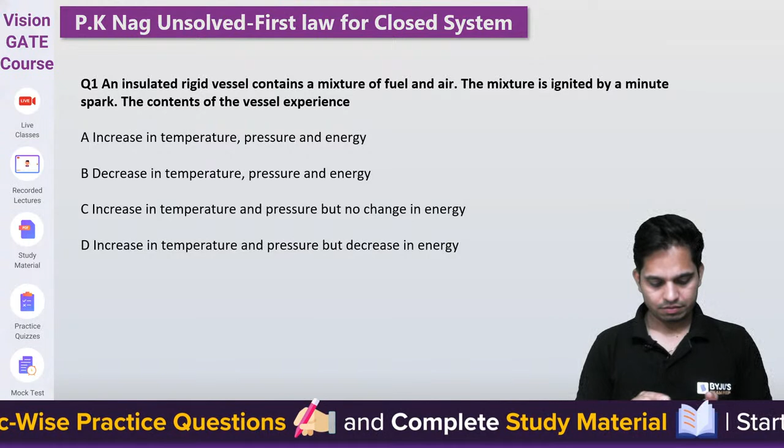Chalo, quickly. Good evening, Anu. How are you? Good evening. Good evening. Quickly answer.

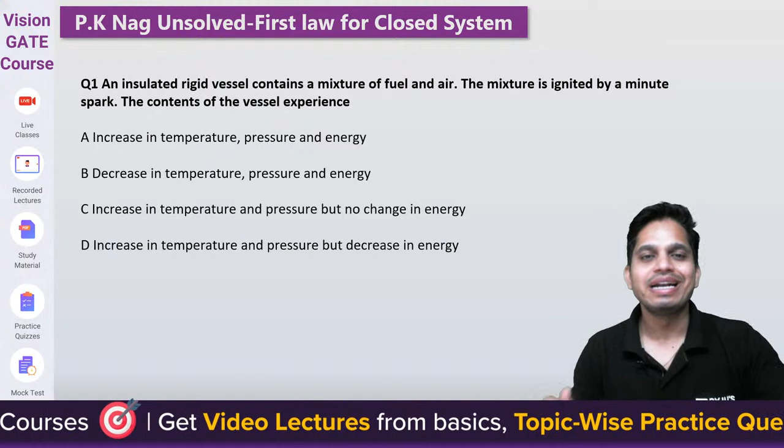So guys, an insulated rigid vessel contains a mixture of fuel and air. The mixture is ignited by a minute spark. The content of the vessel experiences... what are they going to experience, guys?

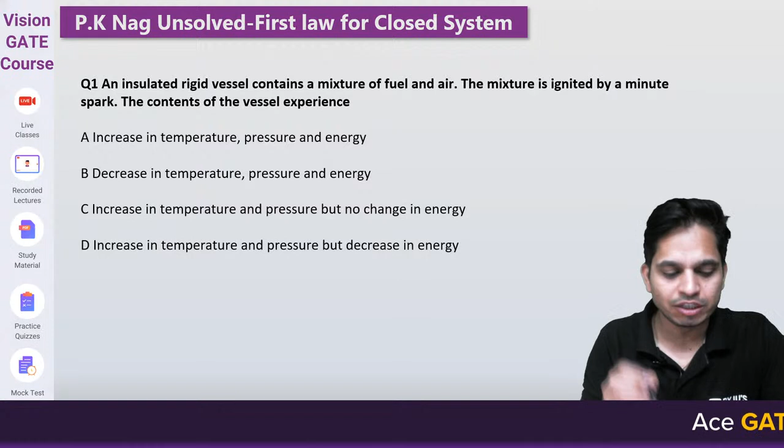So we have a rigid container. There are two things. First, rigid - if they are saying rigid, that means work will be 0. If they are saying insulated, that means Q will be 0. Yes or no, guys?

Now tell me: increase in temperature, pressure and energy; decrease in temperature, pressure and energy; increase in temperature and pressure but no change in energy; or increase in temperature and pressure but decrease in energy. Good evening, Maniket, kaise ho bhai?

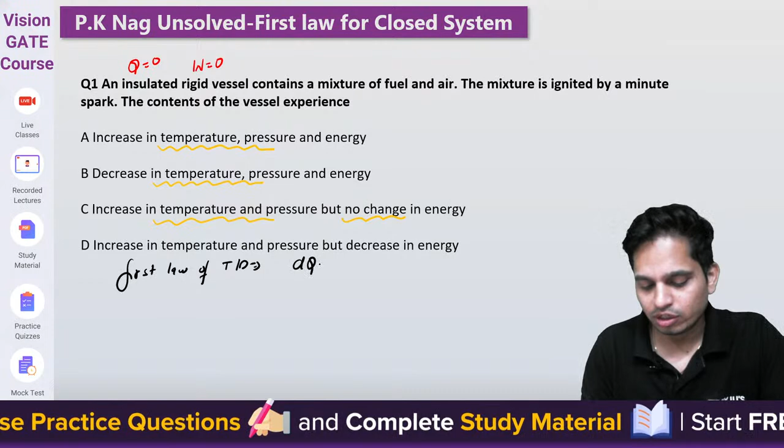So, as you know, first law of thermodynamics tells me that dq is equals to du plus dw. Now there is no heat transfer, no work transfer. So du will be 0. U initial will be equal to U final.

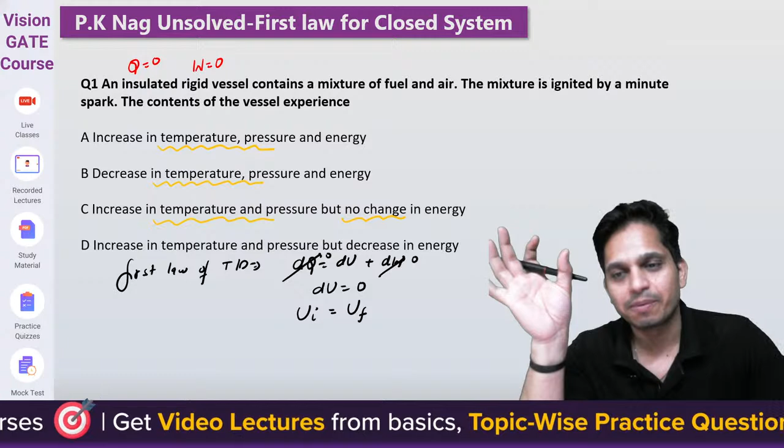Had it been only air, then temperature must have been constant, but it is not air - it is a mixture of fuel and air. So therefore, the energy must remain constant. Only the chemical energy will be converted to thermal energy, that is all, but the total energy will remain same. Total energy will remain same, and therefore C is the correct answer. C is the correct answer. Understood?

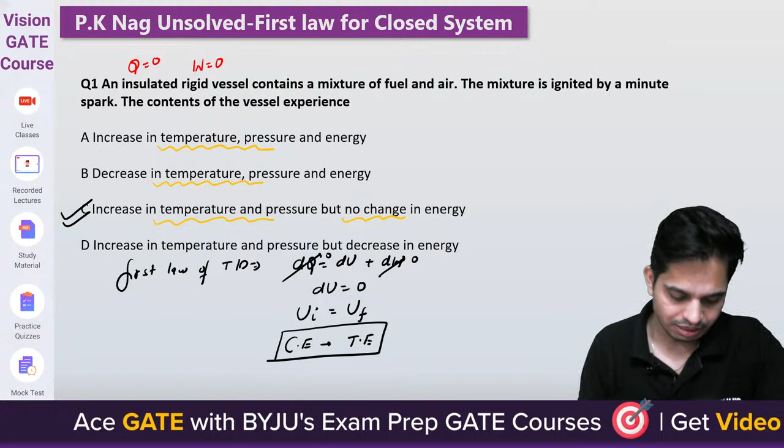Next question. A vertical cylinder with a freely floating piston - so I have a vertical cylinder with a freely floating piston, contains 0.1 kg of air at pressure 1.2 bar and a small electrical resistor.

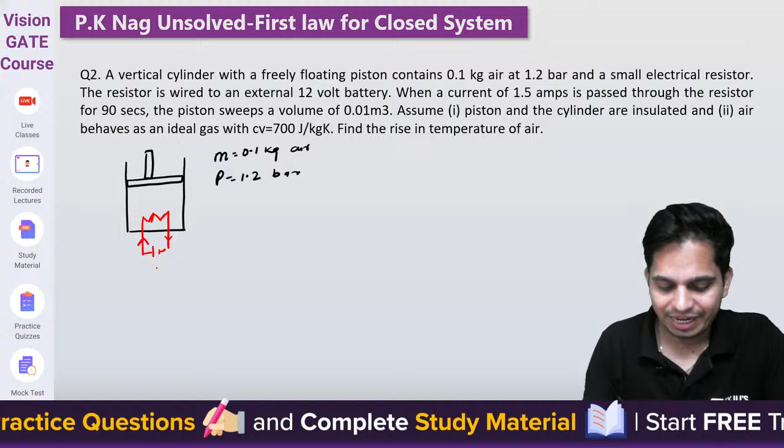What do we have? We have a small electrical resistor. The resistor is wired to an external voltage. Voltage is equals to 12 volt and 1.5 ampere current is passed into the resistor for 90 seconds.

The piston sweeps a volume of 0.01 meter cube - that means your swept volume or change in volume is 0.01 meter cube. Now what do you assume? Piston and cylinder are insulated, that means there is no heat transfer, Q is equals to 0. Air behaves as ideal gas with CV 700 joule per kg Kelvin.

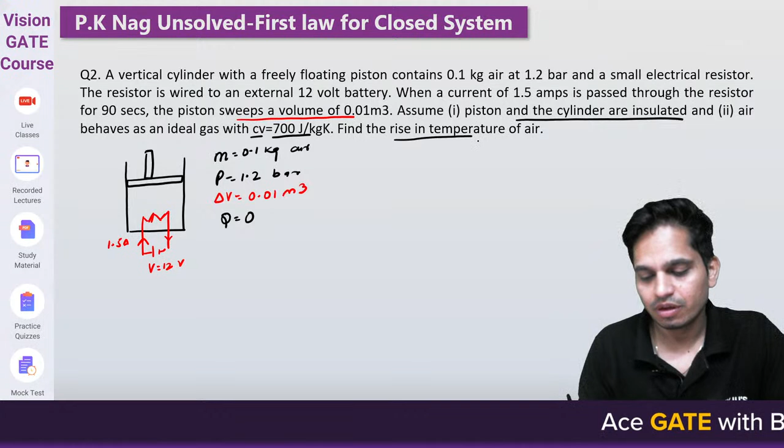So find the rise in temperature. Find the rise in temperature. How do you find rise in temperature? Again, guys, it is a closed system. It is what? A closed system. Now, if it is a closed system,

dq is equals to du plus dw. Yes or no? Yes. It is an insulated system. If it is an insulated system, dq will be 0. And therefore 0 is equals to du plus, now what work is happening? One is piston work and one is electrical work. Now electrical work is given to the system.

Electrical work is given to the system, so you will take minus here, minus. And this will be mCV T2 minus T1, I need to find out T2 minus T1, dt. Plus piston work is how much? PdV minus electrical work, voltage into current into time.

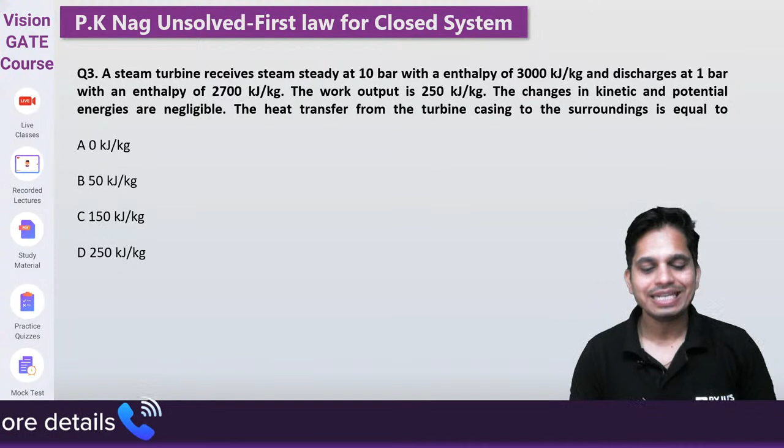Chalo, next question. A steam turbine receives steam steadily at 10 bar, enthalpy inlet H1 is equal to 3000 kilojoule per kg, and comes out at enthalpy H exit as given. The work output is 250 kilojoule per kg. Now changes in kinetic energy.

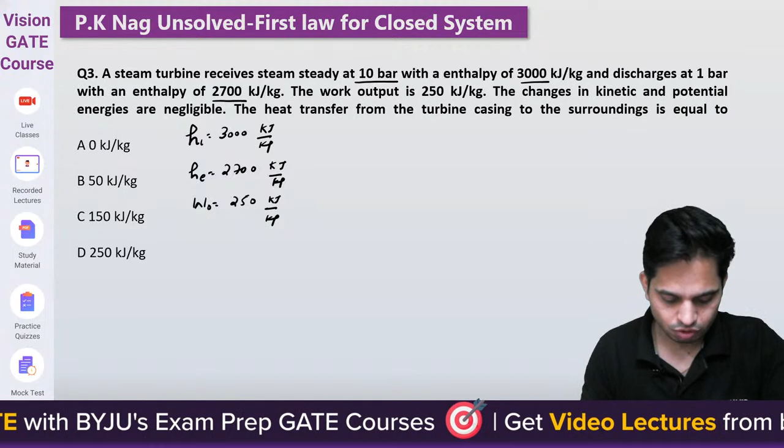Chalo, kinetic and potential energy neglected, the heat transfer from the turbine casing. So turbine, we all know it is steady flow energy equation we can apply, and if kinetic and potential energies are neglected, then I can write...

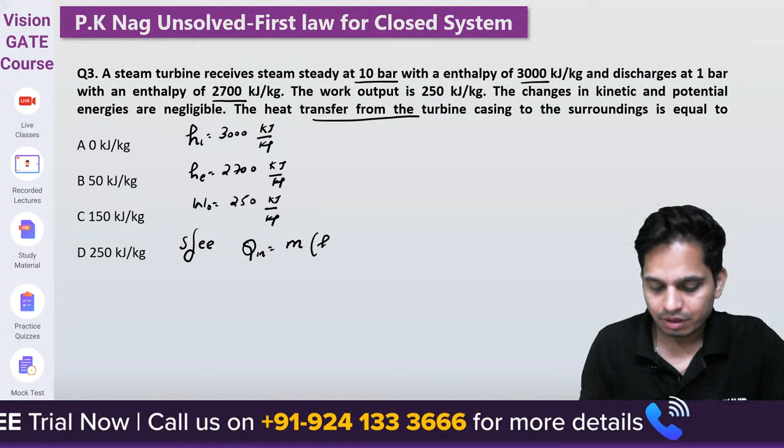Q in is equals to m into (H exit minus H inlet) plus work output.

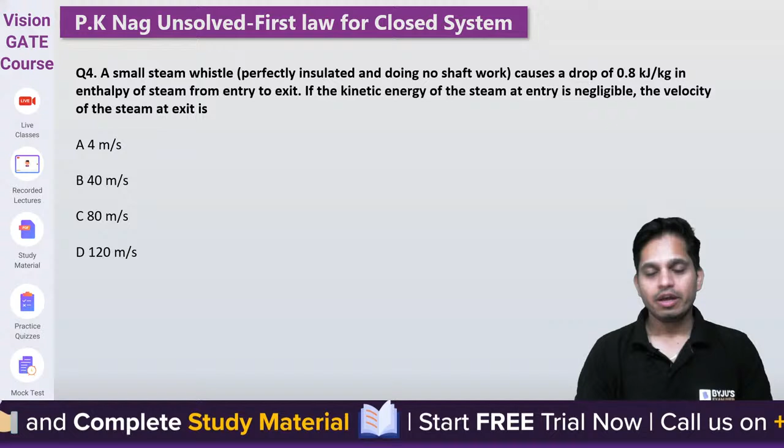A small steam whistle - whistle means nozzle, basically nozzle, okay, perfectly insulated and doing no shaft work causes a drop of enthalpy. Drop of enthalpy means H2 minus H1.

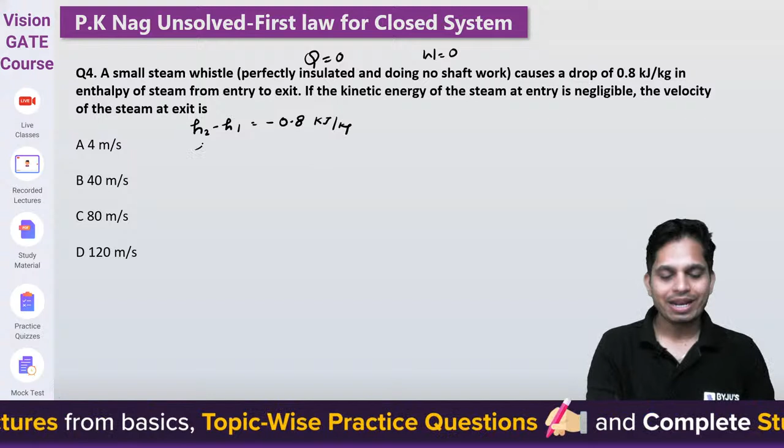Drop means H2 is decreased, so it will be minus 0.8 kilojoule per kg. So can I say H1 minus H2 is equals to 0.8 kilojoule per kg?

If the kinetic energy of the steam at entry is negligible, find out exit velocity. So guys, we all know the formula of nozzle velocity at exit. What is nozzle velocity at exit?

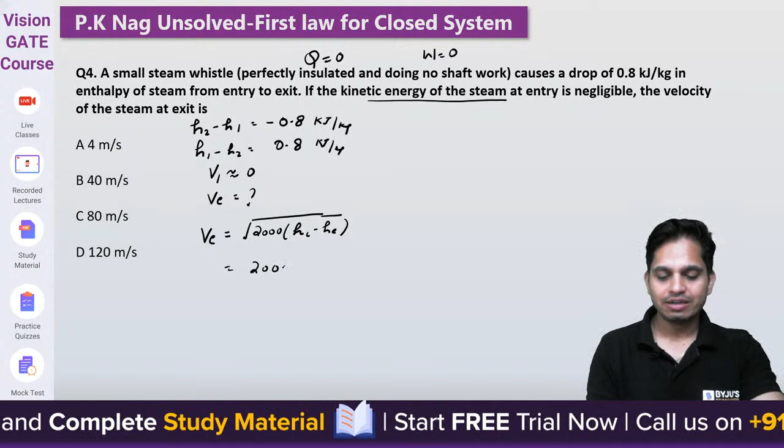It is equals to under root 2000 into (Hi minus H exit). Yes or no? So it is 2000 into 0.8 under root, kitna aa gaya? Yes, 1600, which is equal to 40 meter per second.

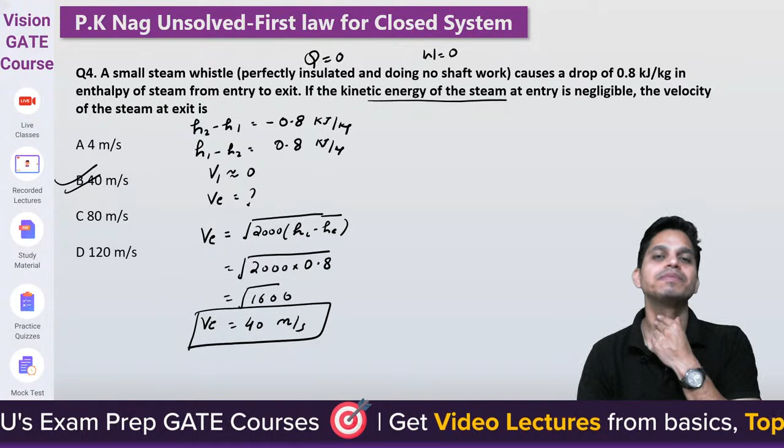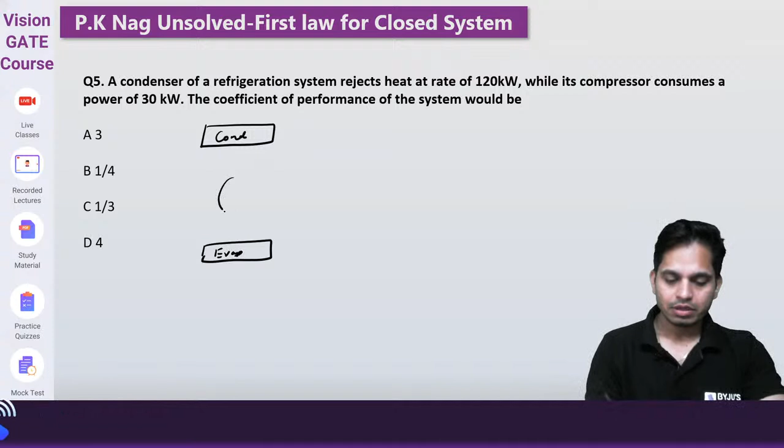A condenser of a refrigeration system - so a refrigerator, I have refrigerator, and this will be condenser, this will be evaporator, this is my cycle taking heat Q1, Q2, work input. So condenser of a refrigeration system rejects heat at the rate of 120, that means Q1 is equals to 120 kilowatt. While its compressor consumes a power of 30 kilowatt, that means W1 is 30 kilowatt.

COP you need to find out. COP is equals to refrigeration effect upon work input. Refrigeration effect, 1/3? Are you saying COP is less than 1? Now what is refrigeration effect?

Q2, and can I say Q2 is equals to Q1 minus W1 if I do energy balance? Arey baba, it cannot be less than 1. COP is never less than 1 of VCRS. For VARS, yes, but for VCRS, COP is not less than 1.

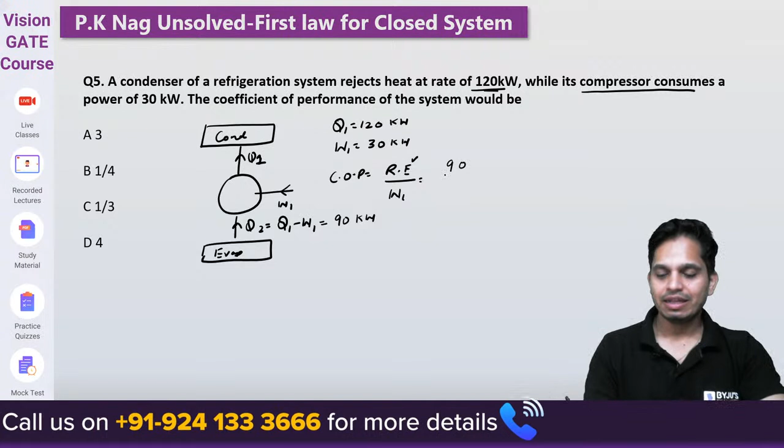Okay, now how much is this? 90 kilowatt, 90 kilowatt, so this is 90. This is 30, therefore it is 3. COP is 3, yes or no? Where is 1/3 or 1/4 coming from?

Yes, it is 3. Chalo, next.

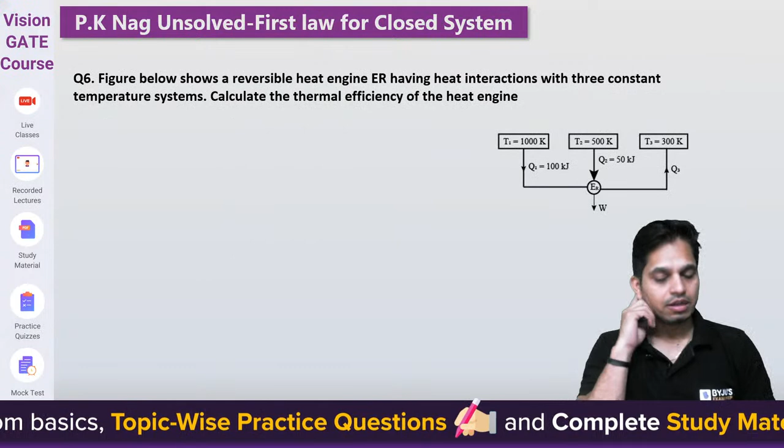Figure below shows a reversible heat engine ER having heat interactions with 3 constant temperature systems. Thermal efficiency - you see, it is a very old question, but these type of question they keep asking. Even recently they have asked this kind of question, okay?

Efficiency of any engine is output upon Q in. Now output is this. What is Q in? You see, this is Q in, this is Q in. So output is W. Q in is what?

Q1 plus Q2. The problem is I don't know W. So can I do first law of thermodynamics for a cycle, that is energy balance?

Energy in is equals to energy out. What is coming in? Q1 is coming in, Q2 is coming in. What is going out? W is going out, Q3 is going out. The problem is I still have 2 unknowns.

I still have 2 unknowns. What are the unknowns? Now this is 100 plus 50, 150 kilojoule. So what will I do? I will do second law, dQ by T is equals to 0.

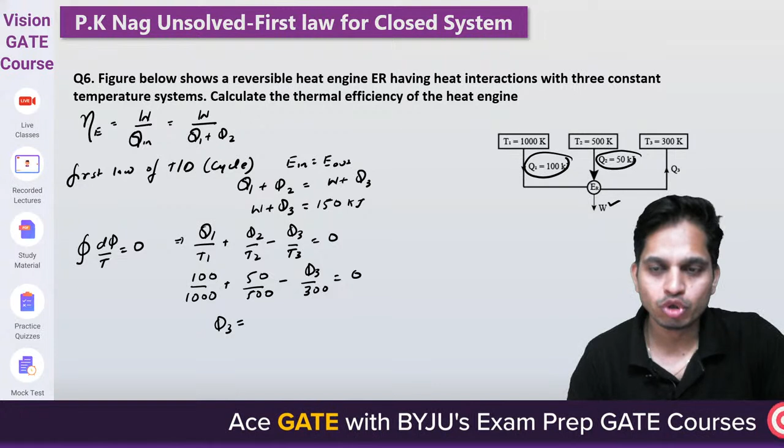Q3 is how much? You are going to get 60 kilojoule. So if Q3 is 60, work is equals to 150 minus 60, means 90 kilojoule. So now you can write 90 by 150 is equals to how much? 60%.

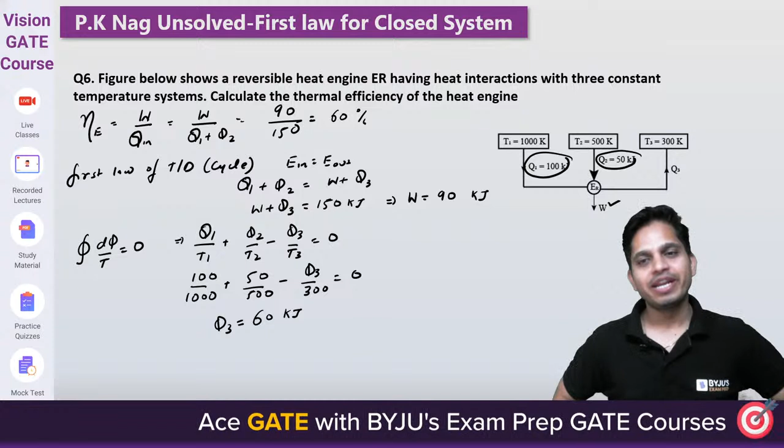Work on your calculations. I don't want you at the end of the GATE exam to come and say sir, calculation mistake ho gaya. Bahut dikkat ho jaayega.

Next, a 1500 watt electric heater is used to heat 20 kg. So electrical work is equals to 1500 watt, used to heat mass of water is equals to 20 kg. Cp is 4186 joule per kg Kelvin, in an insulated bucket.

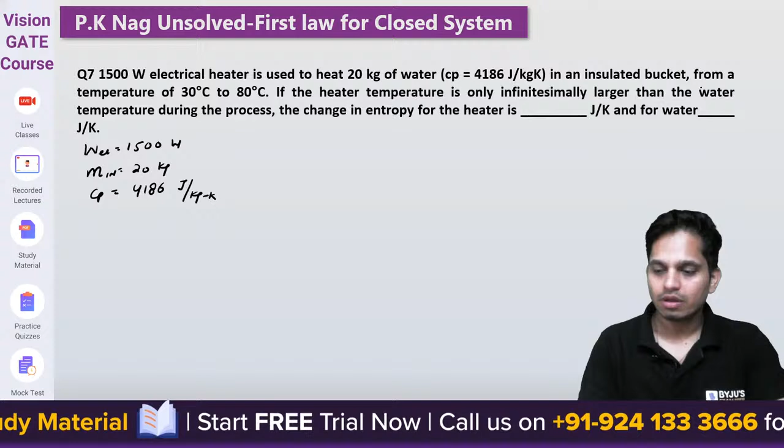Insulated means no heat transfer to surrounding. From a temperature of 30 to 80. So T1 is equals to 303 Kelvin and T2 is equals to how much? 353 Kelvin. If the heater temperature is only infinitesimally larger than the water temperature during the process, then the change

In entropy of the heater, entropy change of heater I need to find out, and entropy change of water I need to find out.

So see, water is very easy. I have told you many cases. First case, is it isothermal or non-isothermal? You have to see it is isothermal or non-isothermal. So I can see temperature is changing of water. So it is non-isothermal, theek hai?

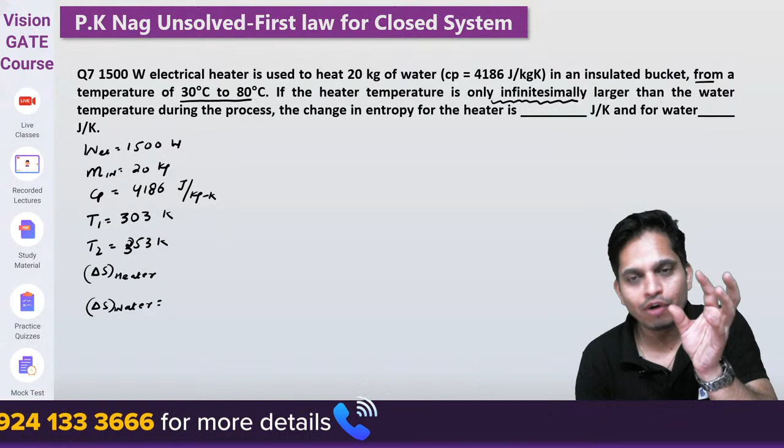Okay, then you go and see if it is non-isothermal, then is it solid or liquid or gas? Because solid or liquid formula is same, gas formula is same. So as I can see, it is water. If it is water, then you can apply the liquid formula.

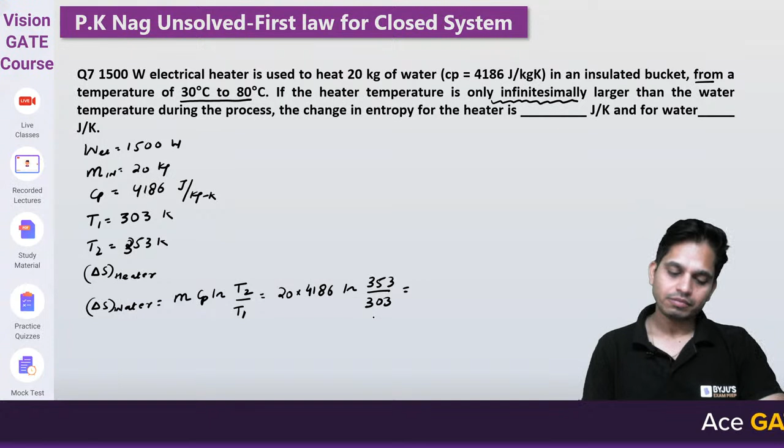What is it? Mass Cp ln T2 by T1, and you can get 20 into 4186 ln 353 by 303. Kitna aayega ye? Kitna aayega?

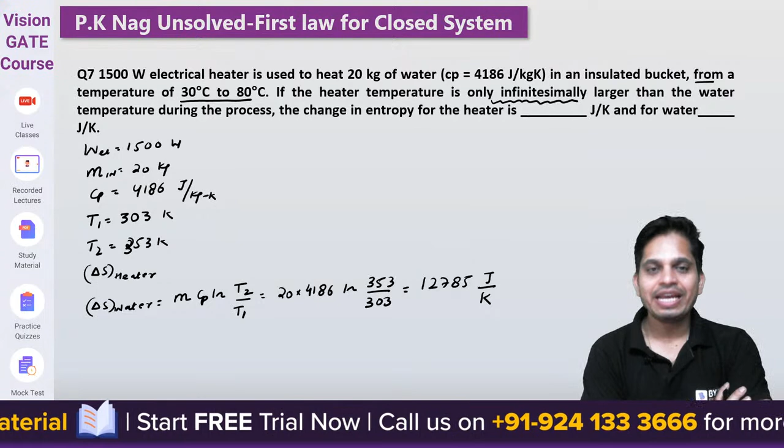Now they are saying for heater, and they are saying heater's temperature is infinitesimally larger. That means when it is 30, then heater temperature is 31. When water is at 31, heater temperature is 32. When it is 80, heater temperature is 81. That means heater also is increasing with the same amount.

Heater temperature is also increasing with the same amount. So it will basically be negative. That means its entropy will be negative of this. It has a negative effect. It is giving heat, water is absorbing heat, so it will be minus of this.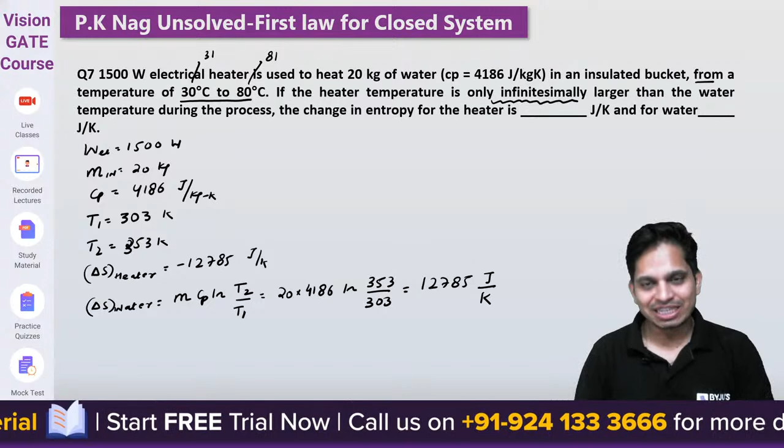And therefore you can write both of them, entropy of heater, entropy of water is this. If the entropy of universe, it's 0, because it is a reversible process. When the temperature difference between two bodies is infinitely smaller, then reversible heat transfer takes place. Reversible, okay, so for universe it's 0. In this process, if you ask how much entropy is changing, it is 0.

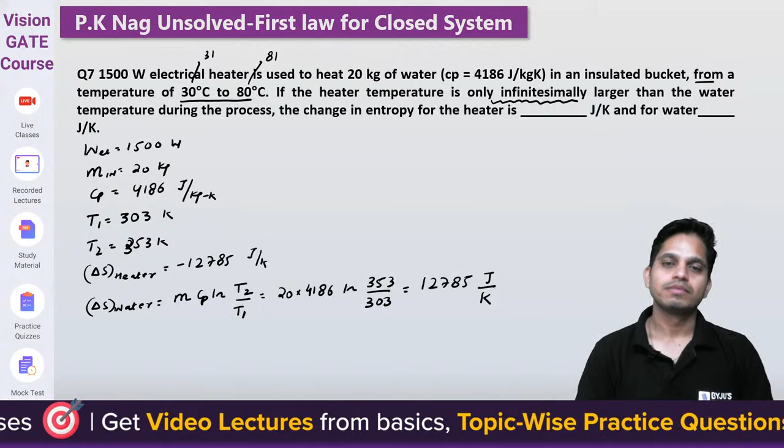Okay chalo, next. For two cycles coupled in series, topping cycle efficiency, a very easy formula. You see, recently also they have asked this question. Bottom is equals to 0.2. Overall, I need to find out overall.

Overall, I need to find out. What is the formula? Guys look, we can make two cycles and we can prove this as well, but in our classes we have proved this. What is this? eta1 plus eta2 minus eta1 into eta2.

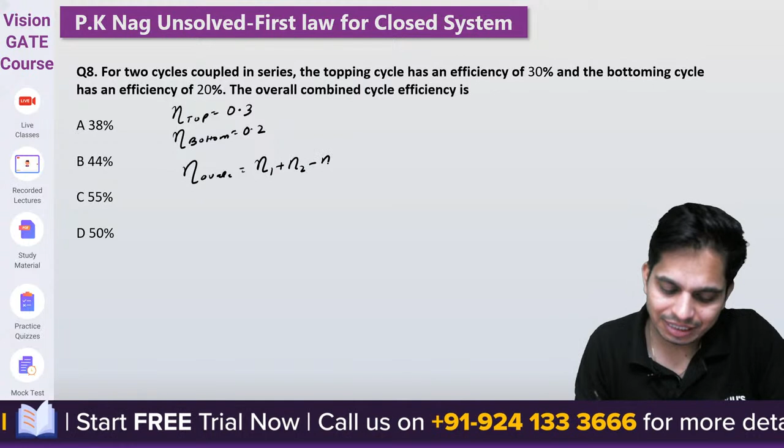0.3 plus 0.2 minus 0.3 into 0.2. Kitna aa raha hai ye? 0.5 minus 0.06, so 0.44, and 44% is the overall efficiency.

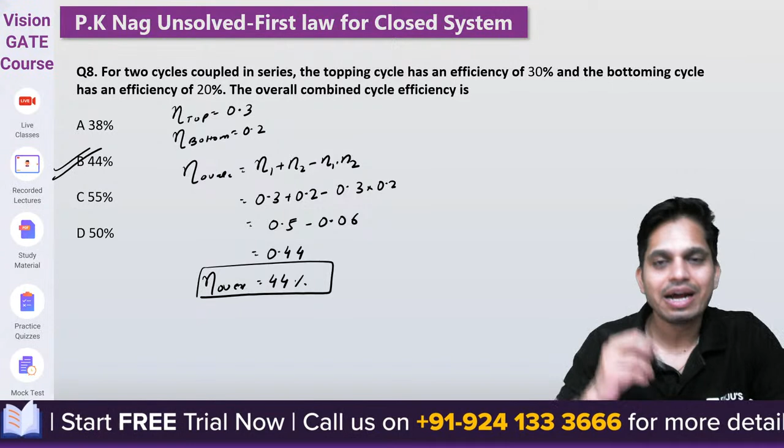Still they are asking these kind of questions. You see, it's a very old question, but still I think it is 1990 something, very old, 1994 or something. Yes, chalo, next question.

Now tell me quickly, what is this expression telling you? T ds by dt at constant pressure minus T ds by dt at constant volume. What is it equal to? What is this equal to?

So if you remember, if you draw a TS diagram, what is the slope of TS diagram? It is dt by ds, dy by dx, isn't it? And if I use constant pressure, that means it is the slope of constant pressure line.

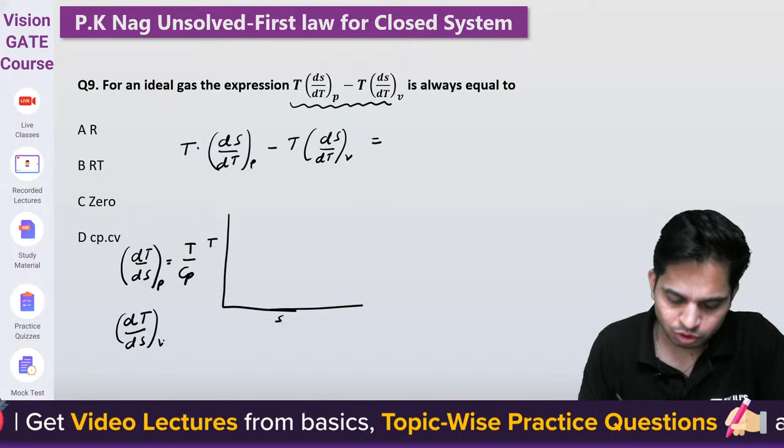So it is T by Cp. Also, dt by ds at constant volume slope is how much? T by Cv. So let me substitute: T into Cp by T minus T into Cv by T is equals to what? T cancels, T cancels. Cp minus Cv is equals to what?

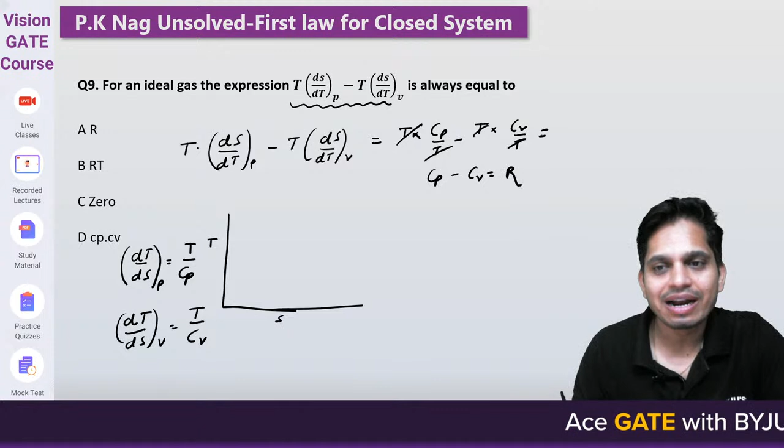R. A is correct, not B. A is correct. Clear? Clear? Okay.

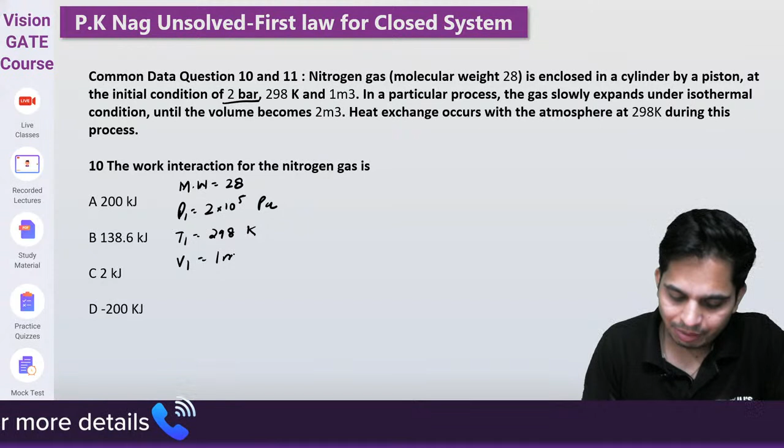Common data question. Nitrogen gas with molecular weight 28 is enclosed in a cylinder by a piston at the initial condition of P1 is 2 into 10 to the power 5 Pascal, T1 is equals to 298 Kelvin and V1 is equals to 1 meter cube. In a particular process, the gas slowly expands under isothermal condition. The process is isothermal, that means T1 is equals to T2, and V2 is 2 meter cube.

Heat exchange occurs with the atmosphere at 298 Kelvin during this process, so there is some heat transfer happening. Calculate the work interaction for nitrogen gas. We all know work transfer in isothermal process is P1 V1 ln V2 by V1.

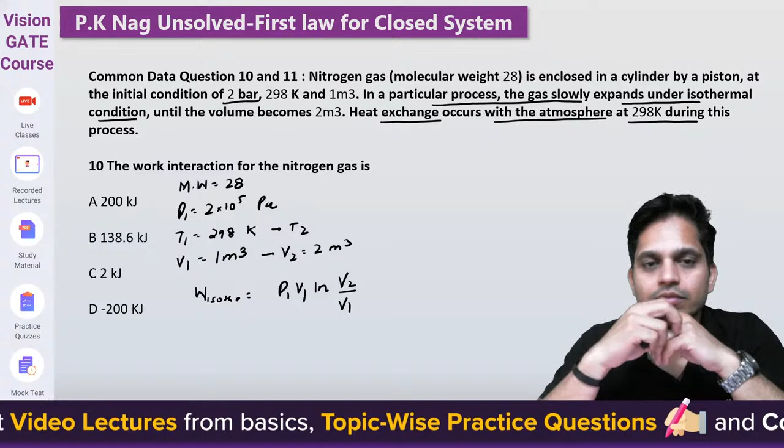Yes or no? P1 V1 ln V2 by V1. Now I know P1, guys, 2 into 10 to the power 5, V1 is 1, ln 2 by 1. How much will this come? 2 into 10 to the power 5 into ln 2.

138.629. I'm getting in joule is 138629.4 joule, but in kilojoule it is 138.

Okay, then what is the next part? Entropy change for universe. Entropy change of universe is equals to entropy change of system, means nitrogen gas, plus entropy change of surrounding.

Entropy change of surrounding, now tell me guys. Of course surrounding temperature is not changing. But system, nitrogen, temperature is changing. No, temperature is not changing. So what will I use? Whenever there is gas, I need to use this formula.

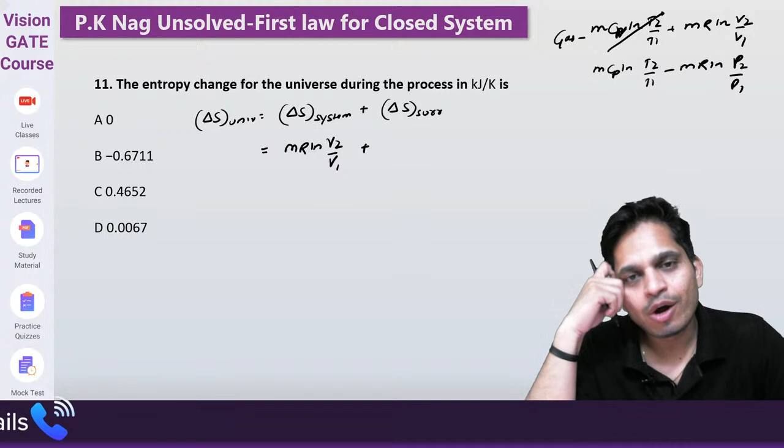Now in surrounding, heat transfer is happening to surrounding, yes, but surrounding temperature is not changing, so Q upon T of surrounding. Now what is mass, sir? Mass I need to calculate, mass is equals to P1 V1 by R T1. So let me write P1 V1 by R T1 into R ln V2/V1 plus Q.

Q is what? How much heat you are adding? How much heat? What is this process, tell me?

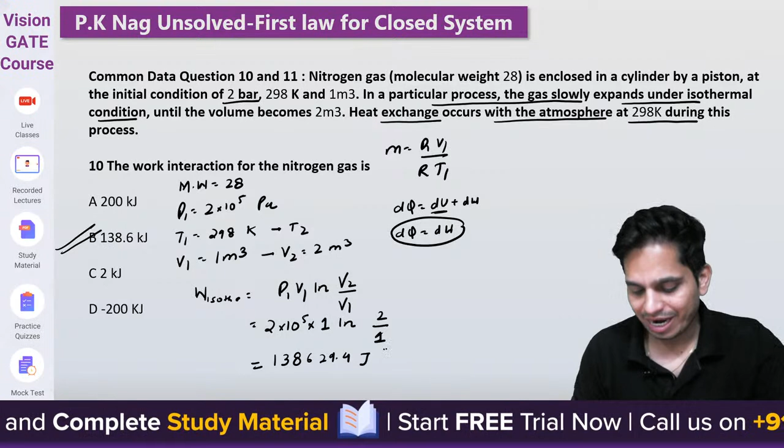Isothermal. For isothermal, dq is equals to du plus dw. Since isothermal, du is 0, that means dq is equals to dw. Same heat, whatever work you are getting, same amount of heat you are adding. So it is work upon T of surrounding.

T of surrounding. Now this R and R you can cancel. P1 is 2 into 10 to the power 5 into V1 is 1, T1 is 298, ln2 plus 138.6. Temperature of surrounding is what?

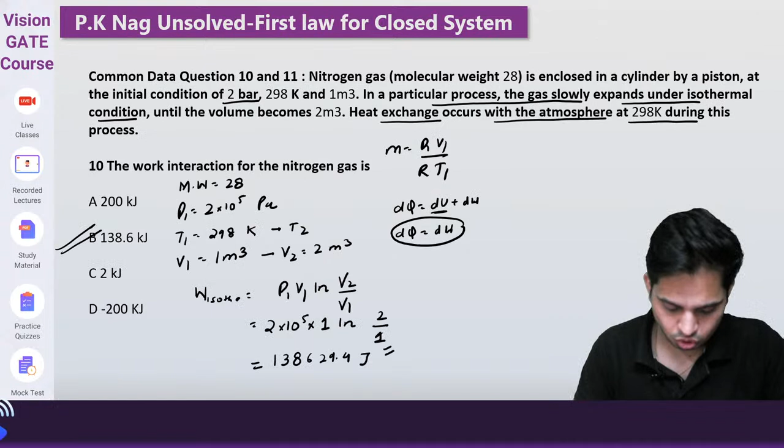298. So now you can calculate entropy change of universe, and yes, you are going to get 0 because they both will remain same, they both will be cancelled, and entropy of universe you will get 0. One will be negative, look, this will be negative.

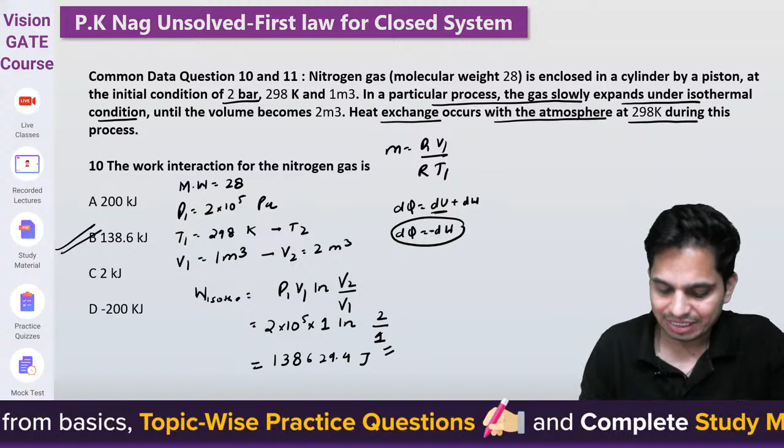One will be negative, one will be positive. So this is minus of work, right? It is minus. So it will be 0. So this will be negative, this will be positive, and it will be 0. If you calculate, you can do that.

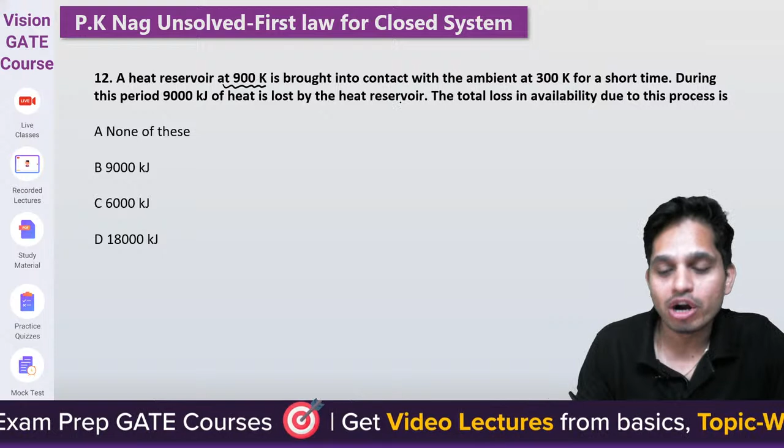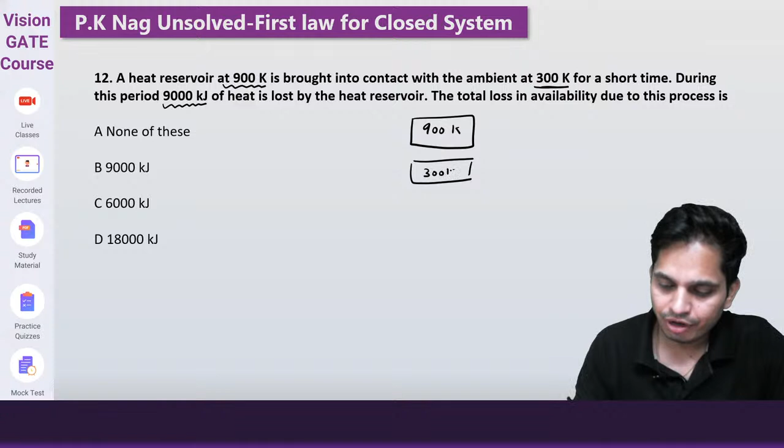A heat reservoir at 900 Kelvin is brought into contact with the ambient at 300 Kelvin for a short time. During this process, 9000 kilojoule of heat is lost by the heat reservoir. I have a heat reservoir of 900 Kelvin and I bring it in contact with a 300 Kelvin ambient. Ambient means temperature of ambient is not going to change. And how much heat is transferred? 9000 kilojoule. We need the total loss in availability.

What is loss in availability? Work lost is irreversibility, which equals T naught into entropy change of universe. So I can also write T naught into entropy change of system, which is my reservoir, plus entropy change of ambient.

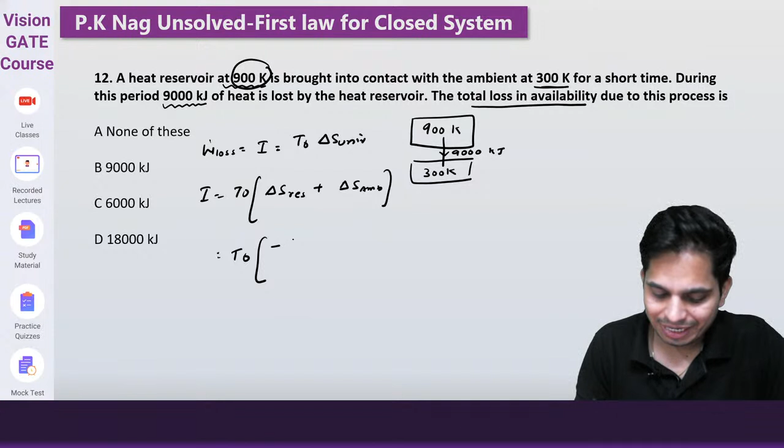Now this is basically Q lost minus Q. The reservoir is losing heat by temperature of reservoir, plus environment, that is ambient, is absorbing heat, Q upon T naught.

Yes or no? Now you can do T naught into minus Q by T reservoir plus Q. So this is minus T naught into 300 into 9000, this is 900 plus 9000. Quickly calculate how much is this? 6000.

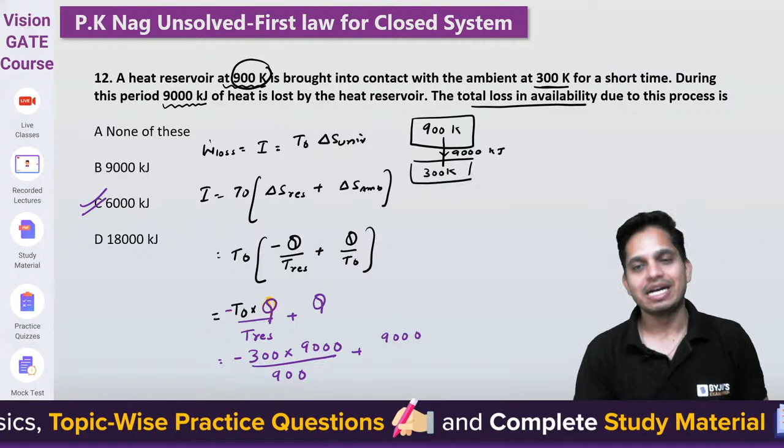Very good, 6000. If you can only refer to the tables that I have given you in class, it is more than enough, guys, your 90%. First of all, you need to find out what to calculate in the question. And then if you found out what to calculate, go for the cases that I have given you in class. Simple. Just try to simplify the problems in terms of cases. Break the question in terms of cases.

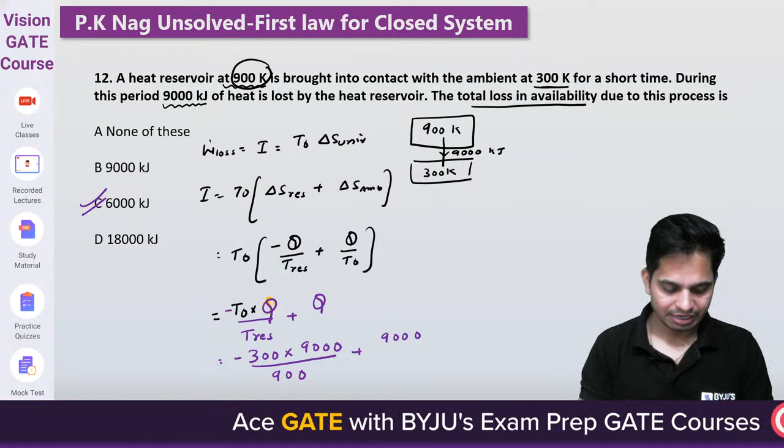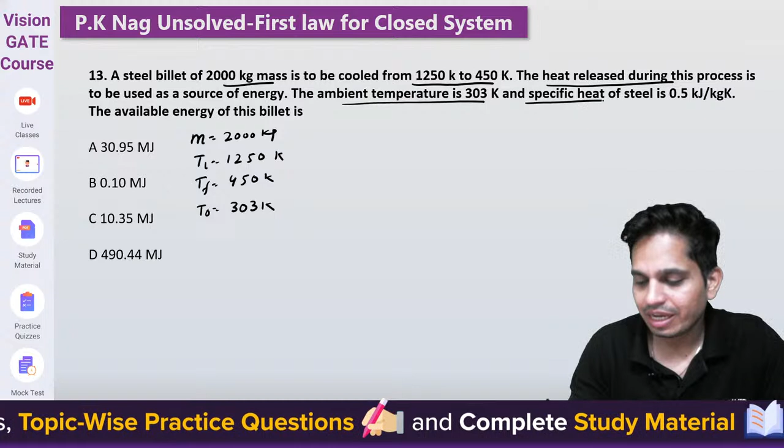6000 is the correct answer. Now, a steel billet of 2000 kg mass is to be cooled from initial temperature 1250 Kelvin to final temperature 450 Kelvin. Heat released during this process is to be used as a source of energy. The ambient temperature is 303 Kelvin, so T naught is equals to 303 Kelvin. The specific heat of the steel is Cp.

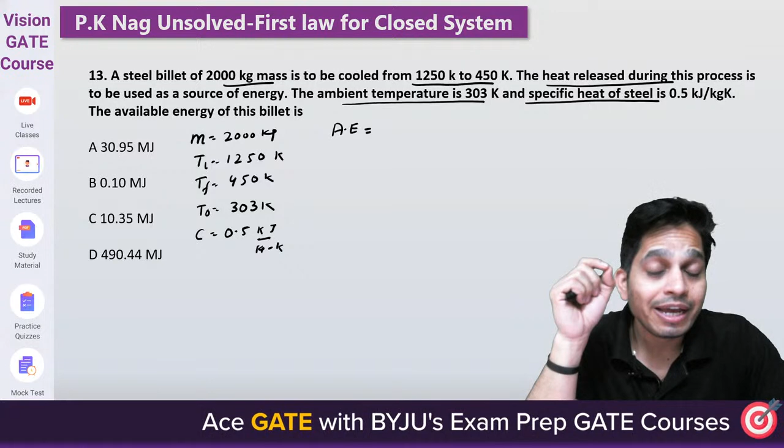Available energy I need to find out. Again, go for the cases. We have done two cases. First, find out available energy for infinite heat source, that means thermal energy reservoir when temperature is not changing. Then the second case is find out availability or available energy for a finite heat source. One is infinite, one is finite. So what is this? Here temperature is changing, so it is a finite heat source.

And what is the formula, guys? T naught into entropy change of universe. Same as irreversibility, we have proved this. Irreversibility and this have the same formula. Now, it is system plus surrounding. System is steel ball, steel billet.

Now, system is non-isothermal solid. For a solid, what is the formula? McLn T2 by T1. Surrounding is absorbing heat, Q upon T surrounding. So T naught, mass is 2000 into 0.5 into ln, T2 final is 450, initial is 1250. I think I'm going to hide it behind me.

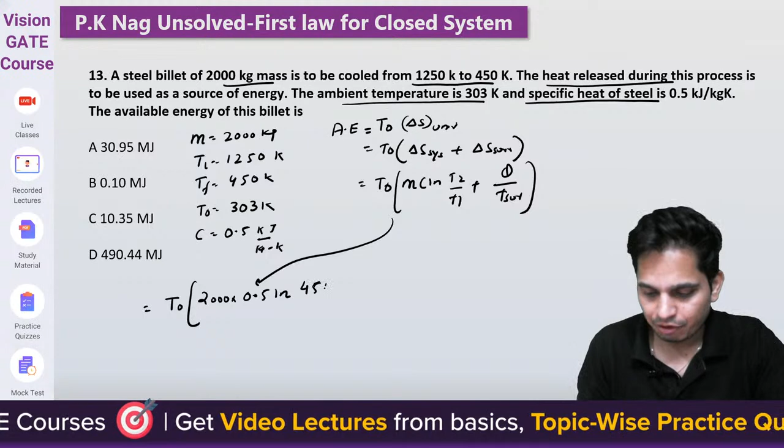So let me erase this, and let me write here. T naught, mass is 2000, C is 0.5, ln T2 is final temperature 450, T1 is initial temperature, plus. Now what is the heat transferred to surrounding?

How much heat is getting transferred to surrounding? By the heat that is lost by the steel billet. So how much heat is lost by steel billet? mc dt by T naught. So I can write this as 303 into 2000 into 0.5 ln. Calculate quickly, guys, calculate quickly.

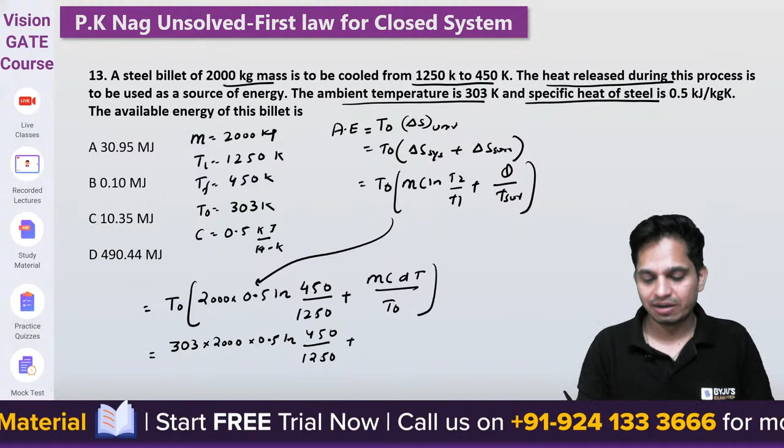Plus now T naught will get cancelled. Mass is 2000 into 0.5 into 1250 minus 450. How much is it coming? How much will it come? Calculate.

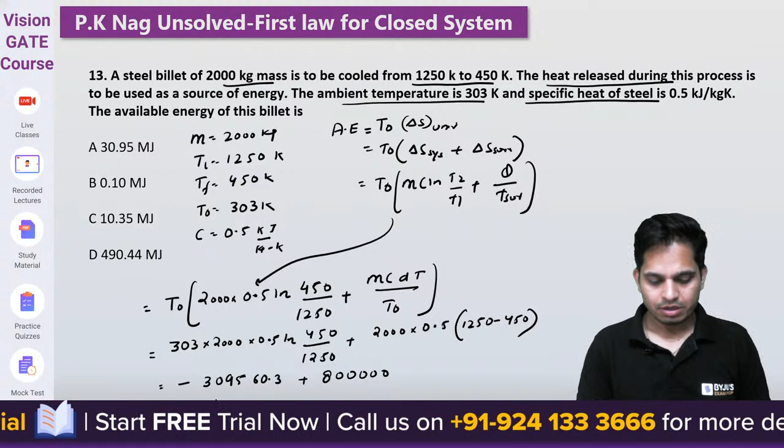Should I calculate it? 303 into 2000 into 0.5 into ln 450 divided by 1250, minus 309,560.3 plus 800,000, quickly, minus 3095, this is 490,439.7 kilojoule.

So if you convert it into megajoule, you will get this. Got it?

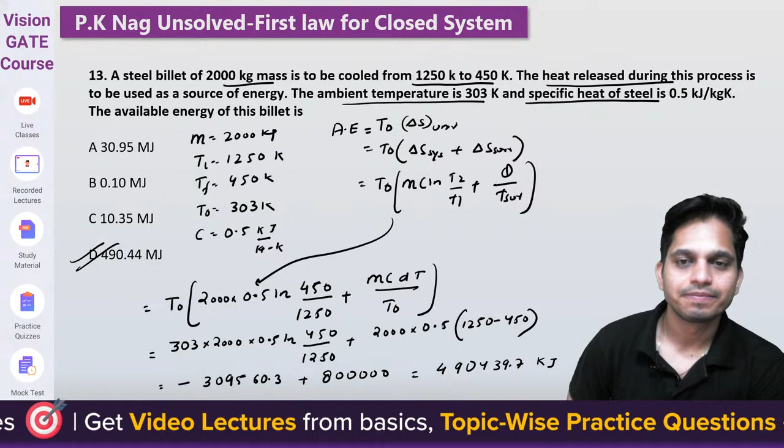Yes, D is correct. Let's move to the next question.

Second last question for today. The following table of properties were printed out from a saturated liquid and saturated vapor of ammonia. The titles for only the first two columns are available. All that we know is that the other columns, 3 to 8, contain data on specific properties, namely internal energy, enthalpy and entropy.

Now they are asking to calculate the specific enthalpy data. Tell me in which table we have the specific enthalpy data. Before you go ahead, I need you to remember one thing.

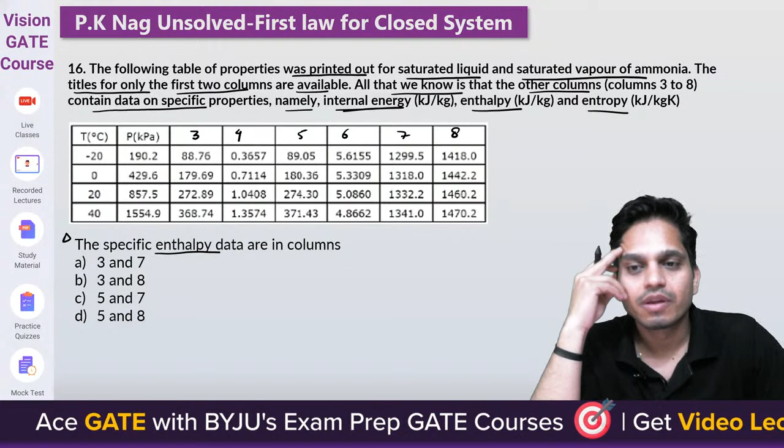H is equal to U plus PV. That means H will be greater than U, and U will be greater than S. So S will be the smallest, U will be in the middle, H will be the highest. And if you closely watch the figures, U will be very close to H.

Now, as you can see, I have to find the highest enthalpy values, the columns with the highest values. Can you tell me which ones they are?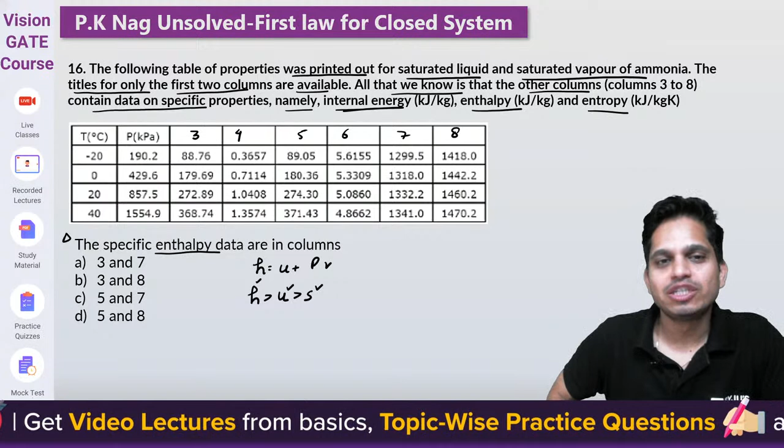As you can see, this is 88.76, and if you add something to it, it will be 89 - this is your enthalpy of fluid. Now 1299 plus a little bit more will be 1418, so this is your Hg. So these are your enthalpy columns, these are your entropy columns, and these are your internal energy columns: SF, UF, UG.

So it is columns 5 and 8.

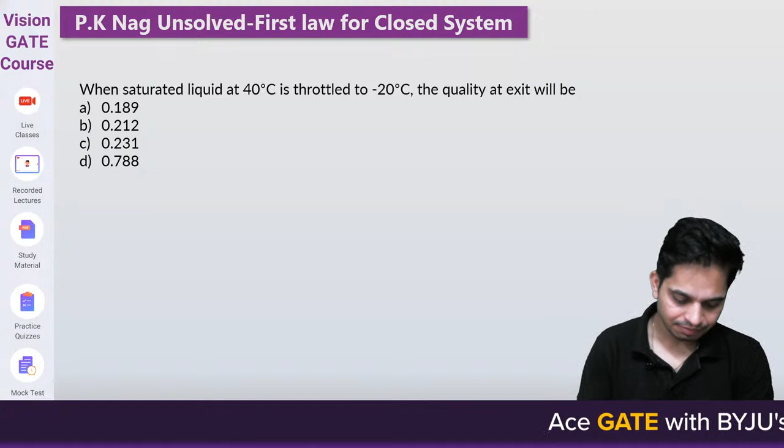Now next they are asking: when saturated liquid at 40 degrees Celsius is throttled, find the quality at exit. That means if I have a TS diagram and I am throttling like this, from 1 to 2, this is my 40 degrees Celsius. Throttling you will do for liquid only, right? Down to minus 20 degrees Celsius. So I need to find the quality, X2.

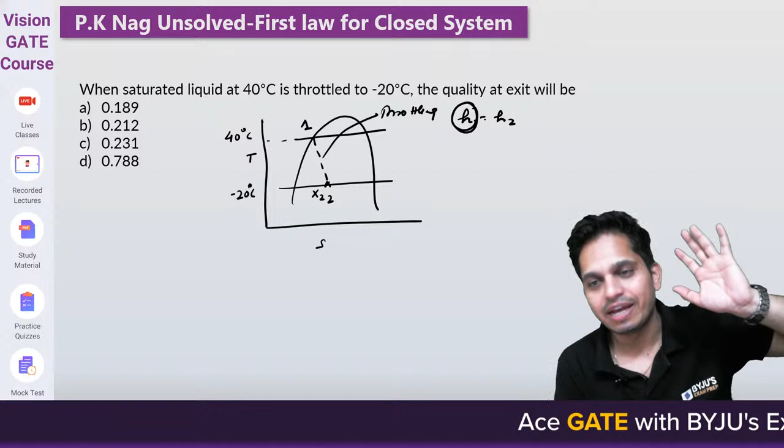And what is H1? First I have to see where point 1 is - it is at 40 degrees Celsius, on the saturated liquid line. So at 40 degrees, saturated liquid means HF. So this is 371.43.

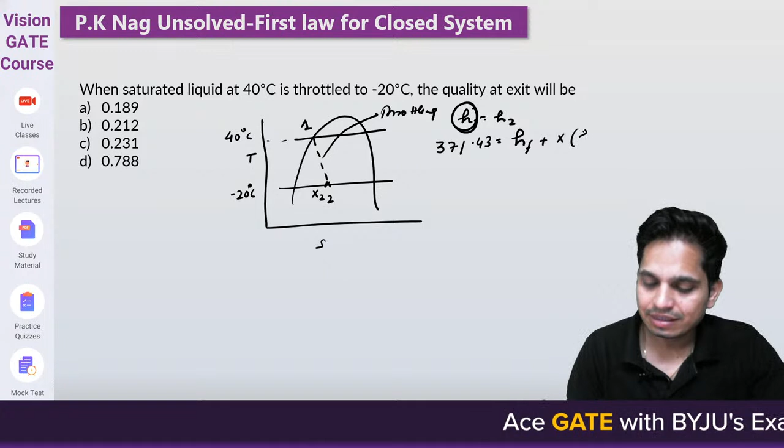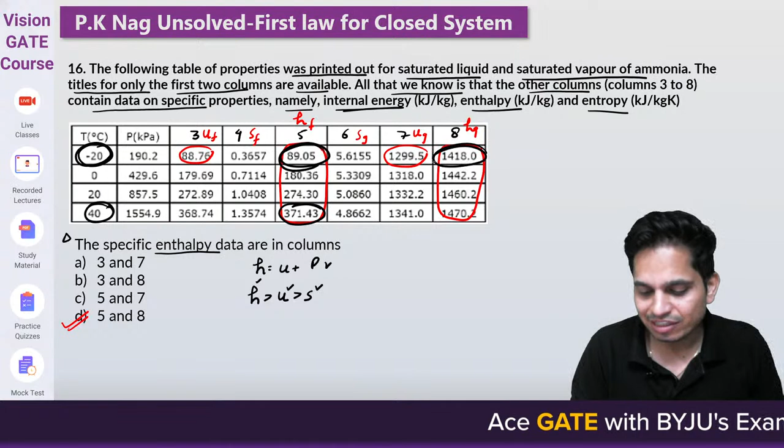Now H2 will be HF plus X times (Hg minus HF). Whenever I find anything from point 2, I have to see where point 2 is, at minus 20 degrees. So whatever value I need, I will find from minus 20 degrees - I need HF and Hg from minus 20. So this is my HF, this is my Hg, 89.05.

Plus X times (1418 minus 89.05) equals 371.43. So now you can find your X.

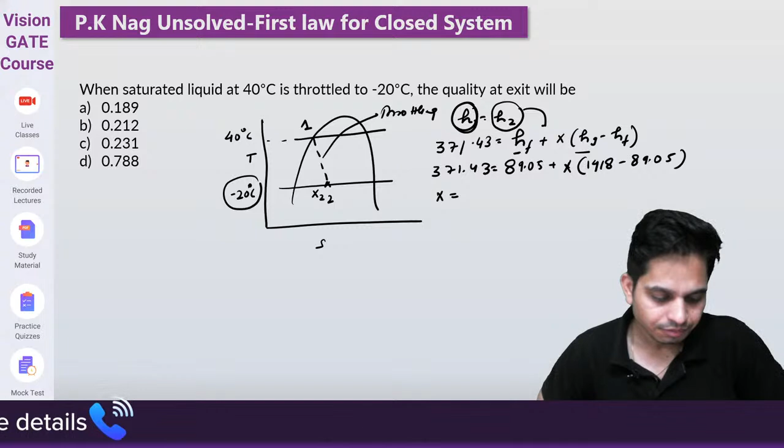How much is X? Should it be very high? So, sorry, very low - it is near the liquid curve, so it should be very low. If it were near the vapor curve, it should be very high.

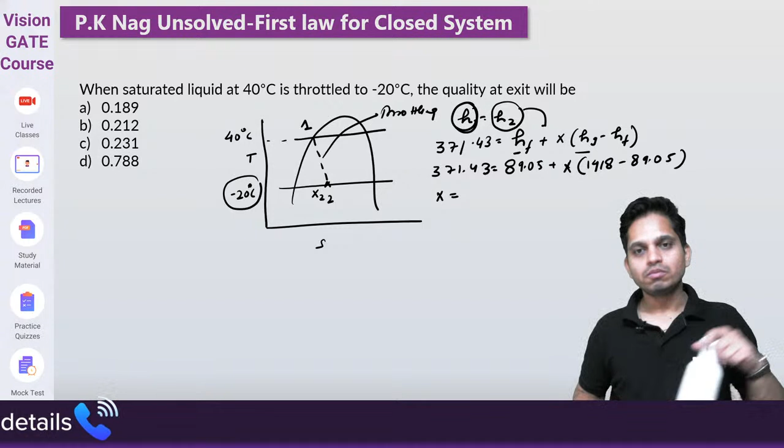Yes, I think it is correct. Just calculate - if you have calculated correctly, it should be correct. So I think this is correct, 0.212. Very good guys.